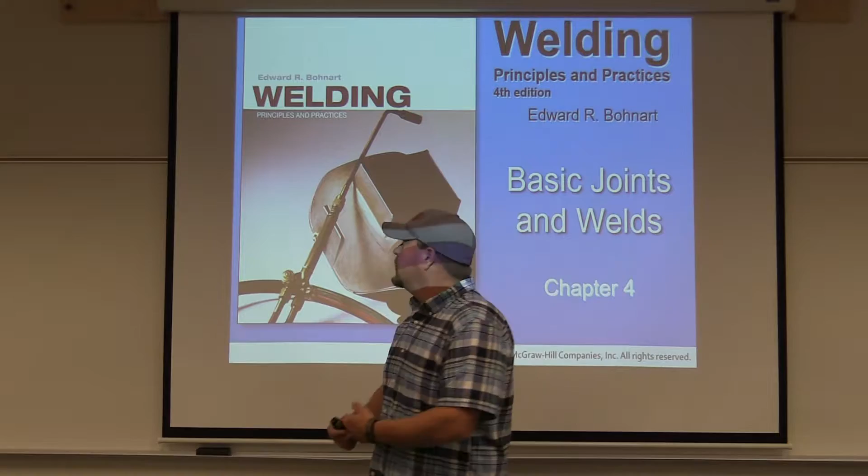There are going to be several different chapters that go beyond this as well. This is just the basic joints and welds to start with. Then we'll get into reading shop drawings in Chapter 29, and after that Chapter 30 will be welding symbols and so forth, all right?

Start out with the first slide here, main objectives. The 5 basic joints and welds applied to each. Remember, there's only 5 basic joints, okay? And how to measure fillet and groove weld sizes.

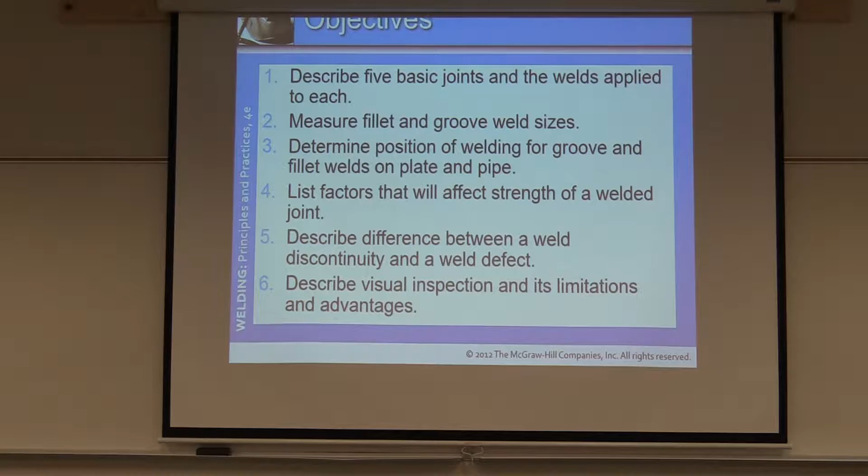Let's cover the basics first. So if you're in your book, go ahead and flip to page 118, Chapter 4. I would definitely highlight underneath types of joints - beginning of that paragraph, there are only 5 basic types of joints: the butt joint, corner joint, edge joint, lap joint, and T-joint. Shows them all, and then an explanation above that in figures 4-1.

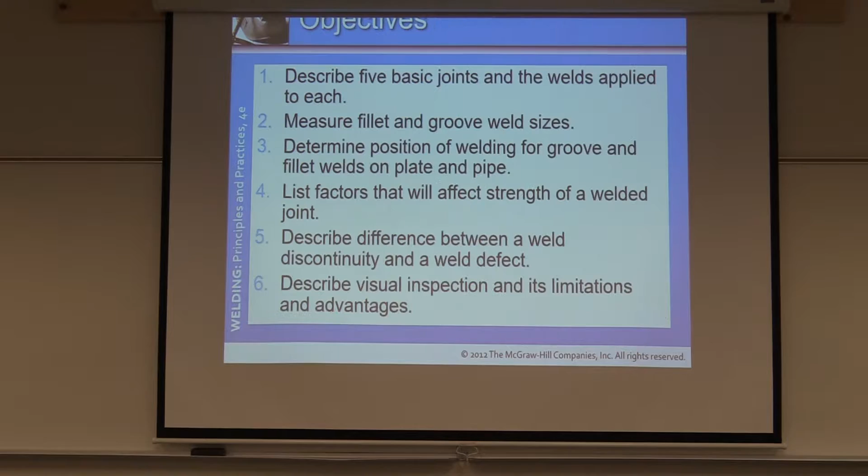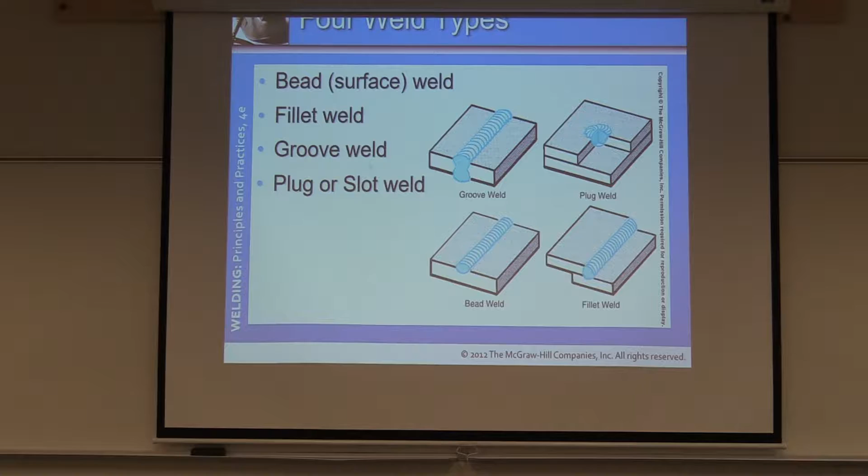Okay. I cannot believe - wow, it does not show the 5 different types. So, there's a few things that I wish were in the PowerPoint. However, I'm not always able to accommodate because they may not have those.

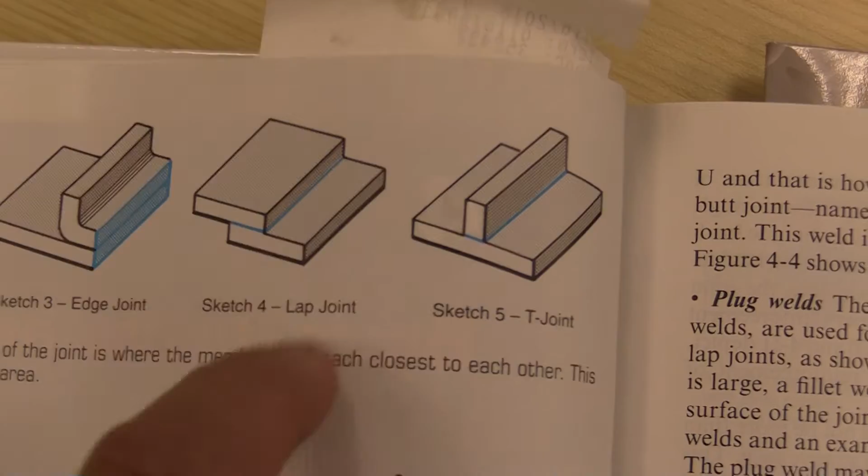So let's touch on them this way. Sketch 1 is the butt joint where 2 members butt up against each other. Okay, the corner joint, where 2 pieces are on their corner. Edge - pretty self-explanatory, the edge pieces of both. And a lap joint, okay?

And a T-joint. Now these are not to be confused - sorry, when we get into fillet welds I'll explain this further on. Let's just leave it at this for now: a lap joint, T-joint, that is on page 118, Chapter 4, okay?

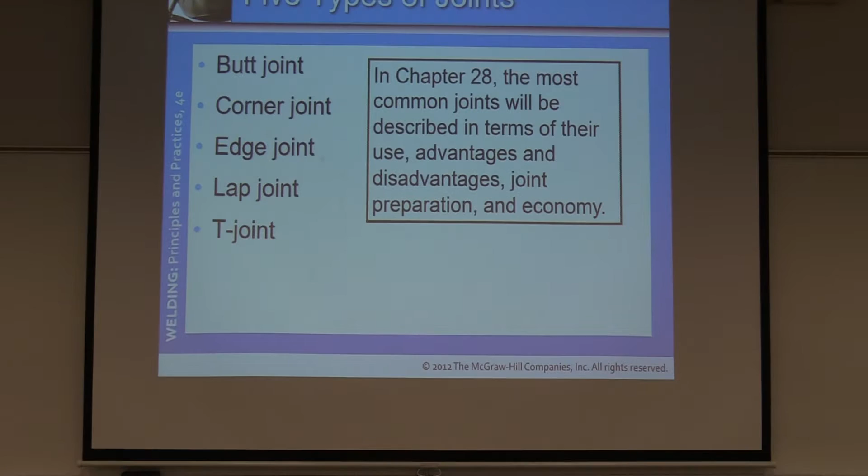All right, moving on. There are 4 weld types. They were also in that same, right underneath there in figure 4-2, same page, page 118, Chapter 4.

There's a bead weld, which basically is a surfacing weld, correct? A fillet weld, far right hand bottom corner there. A plug weld, and a groove weld.

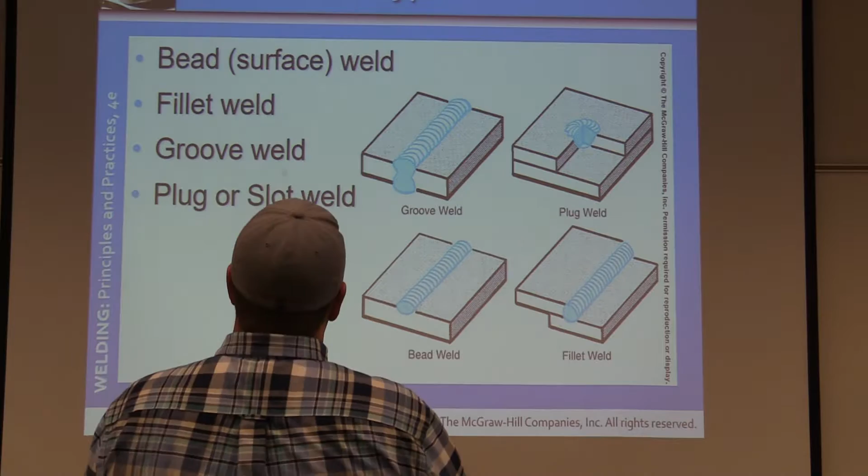So one of the things I want to help explain is that this is a lap joint, okay, but a fillet weld. So a lap joint is where 2 members are lapping over each other. However, if you notice, it's the same weld, the same triangular shaped weld that would be on a T-joint. Same thing, same fillet weld, whether it's a lap joint or a T-joint.

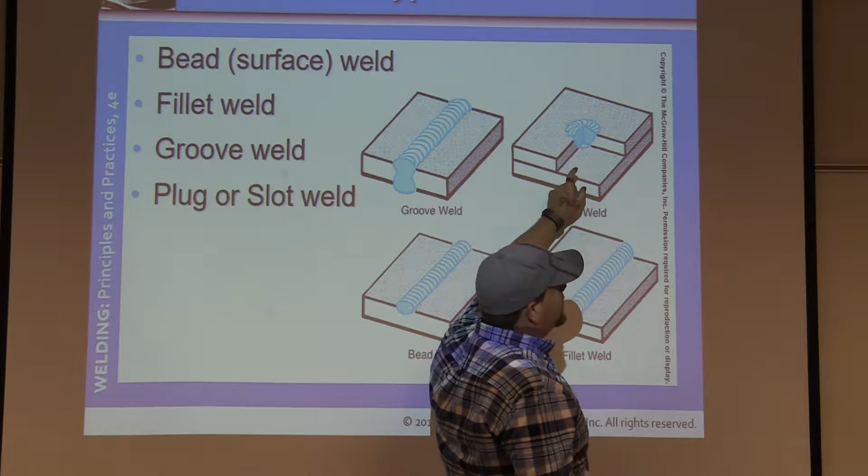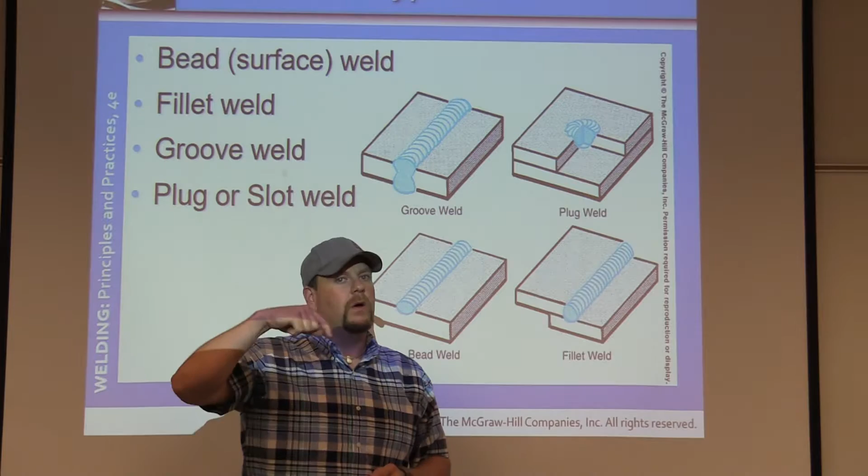A bead weld, as you can tell, that's just for the surface, the surfacing weld itself. Now a plug weld can be several things, of how it can be classified, I should say. To start out with, say the plug is 2 inches deep - the entire thing would be a plug weld. However, each pass might be a fillet weld as we are going around, going up to fill the plug weld, okay?

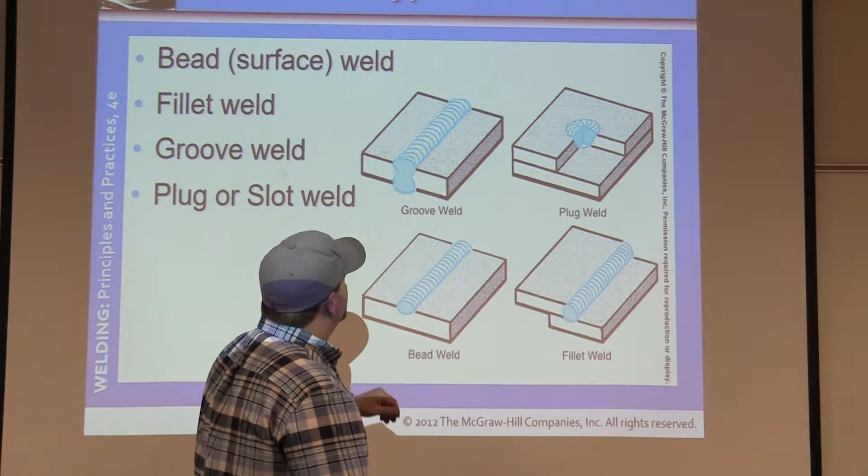Groove weld is done in a groove situation. So we'll talk a little bit more about this as we're going through. But under page 118, Chapter 4, I would make it a point to highlight the bolded items under the 4 weld types: the bead weld, fillet weld, groove weld, and plug welds.

Okay, I don't see anything specific that I want to point out on that page. So a bead weld is also called a surfacing weld - single pass deposits of weld metal used to build up pad of metal and to replace metal on worn surfaces. First welds that we do in shop, correct? Just on the surface.

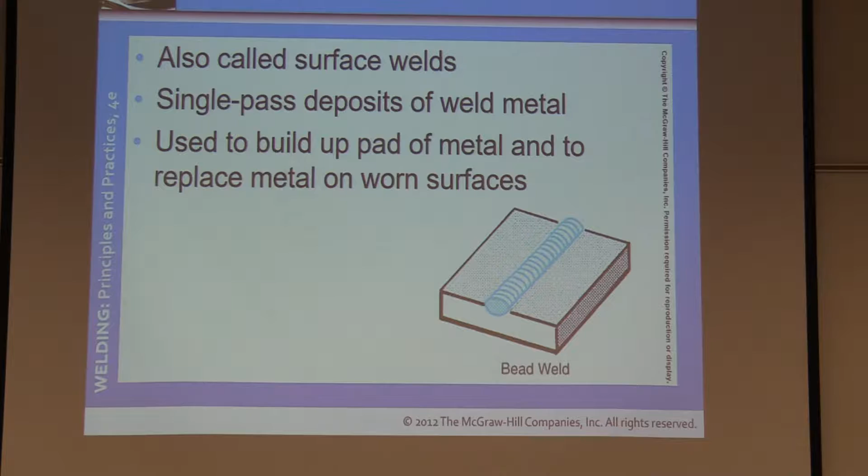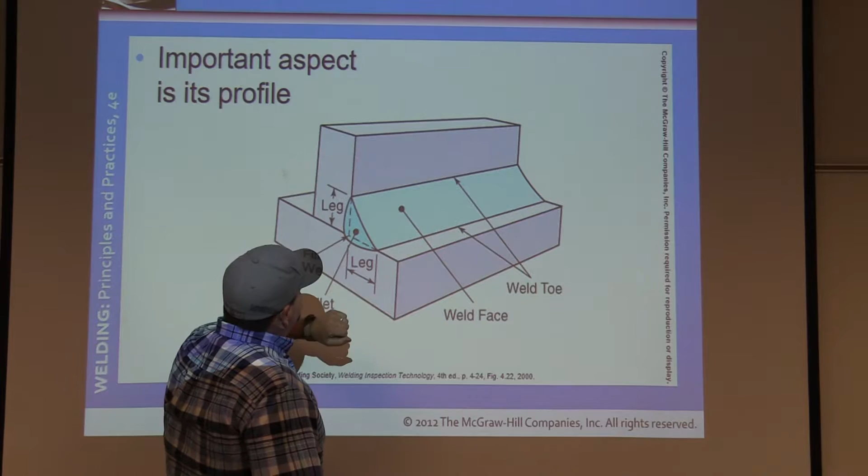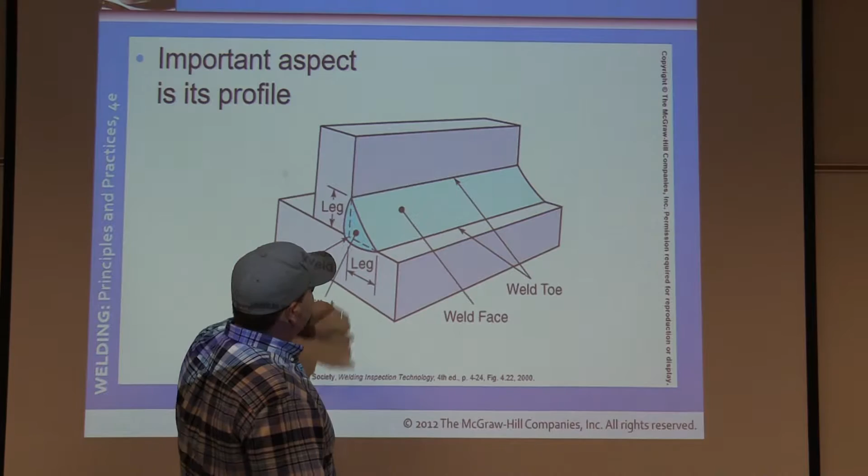Okay, let's stop right there. So right here, we've talked about this in other sections or chapters as well. We are measuring the size, but it is a right triangular cross section that helps define a fillet weld, okay? It can be measured off of different leg sizes and so forth. However, a right triangular cross section...

...is how we define a fillet weld. As you can tell, I keep saying that for a reason - I really want you to know that it is a right triangular cross section. Right there, okay? It's used on lap joints, T-joints, open corner joints.

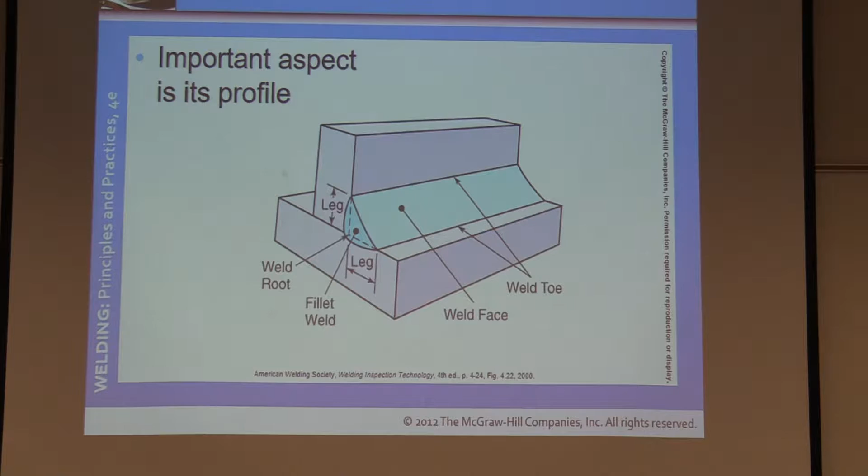We will learn the weld symbol as we go further on. It's important to know as you're looking at the fillet weld especially. Let's make note of where they are.

Weld face is the face of the weld that we're going to see. The weld root is where the two closest members are joined. I want you to look up the definition of the weld root. When we get into weld symbols, we will be breaking this down even further. However, it's where the two members are closest together that are to be welded.

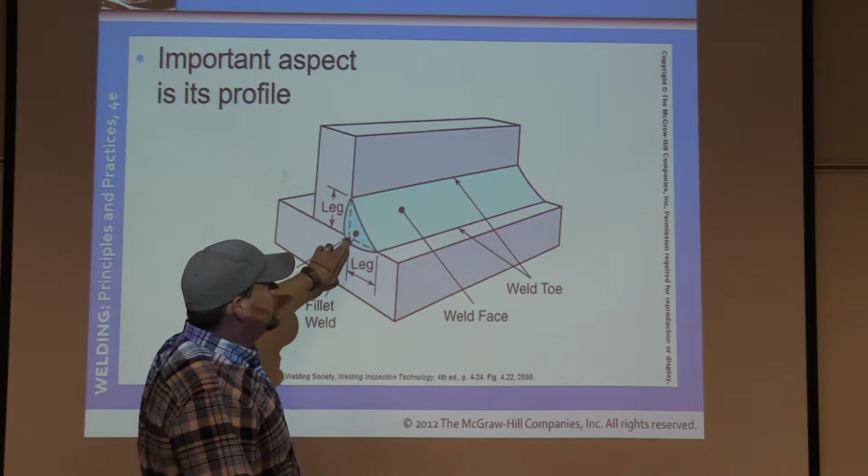The important thing is the leg size. Remember, that's how we size a fillet weld. We measure the distance from the root to here, half inch, or whatever it might be. At this point, we definitely know what the weld toe is.

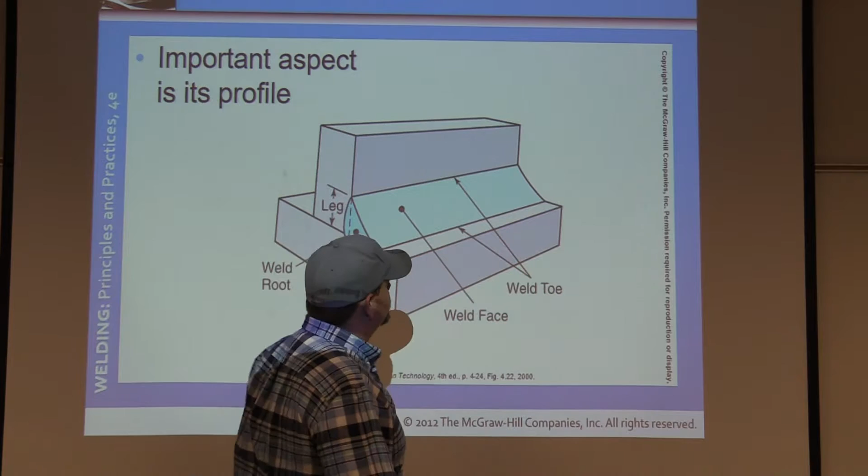Groove welds consist of one or more beads deposited in the groove. Used for butt joints, unprepared with square edges, prepared with bevel or a J groove. If both members are prepared the same, they take the shape of a V or a U, named V or U butt joint. Wow, that's getting a little too crazy there.

We'll talk about that in welding symbols further on. But if you notice, look at this, and I said the same with fillet welds, it consists of one or more beads. So it could be a single pass, which is just one weld, or you may see it referred to as a multi-pass or multiple pass weld, fillet weld or groove weld, and so forth.

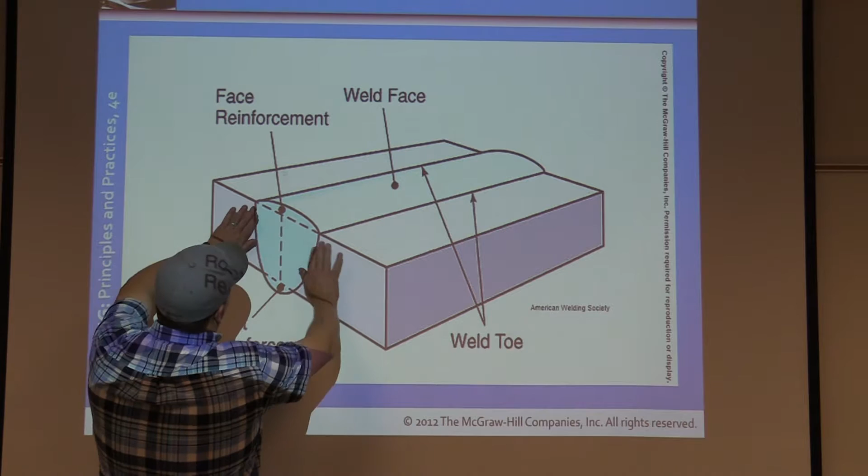Groove welds are just what it's showing here. In this particular situation, these two pieces of material are butted up together, so this is a butt joint. Now there's no angle of preparation on it whatsoever.

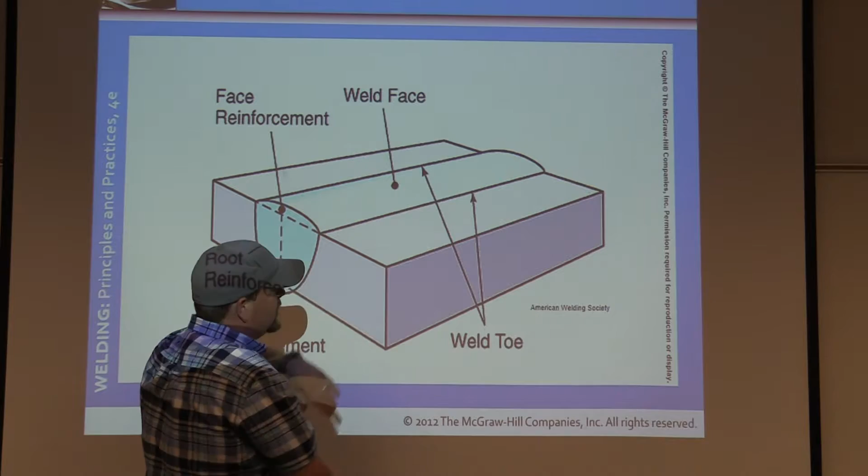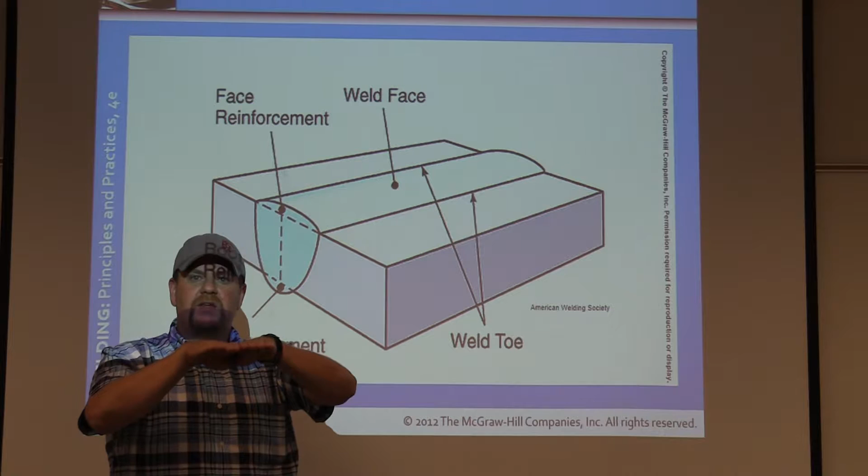This makes it look like it's 10 inches tall, but again, this is not to scale. A butt joint is a butt joint. It doesn't matter whether it's 1/16 or a razor blade thickness, or if it's 10 inches of steel. If the two members come together and butt up against each other, it is still a butt joint, no matter the thickness of material that we will be welding.

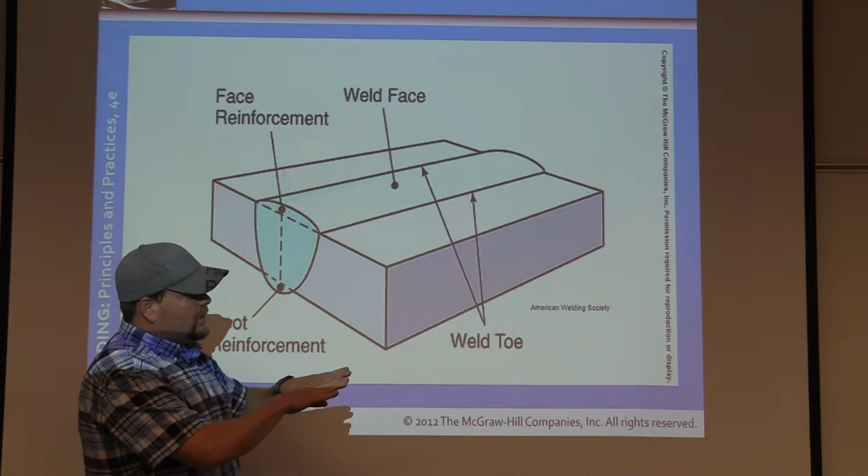So in this case, it might only be a real thin material, and I'm assuming so since there's no angle of preparation on the weld at all. So this is more than likely a single pass groove weld on a butt joint.

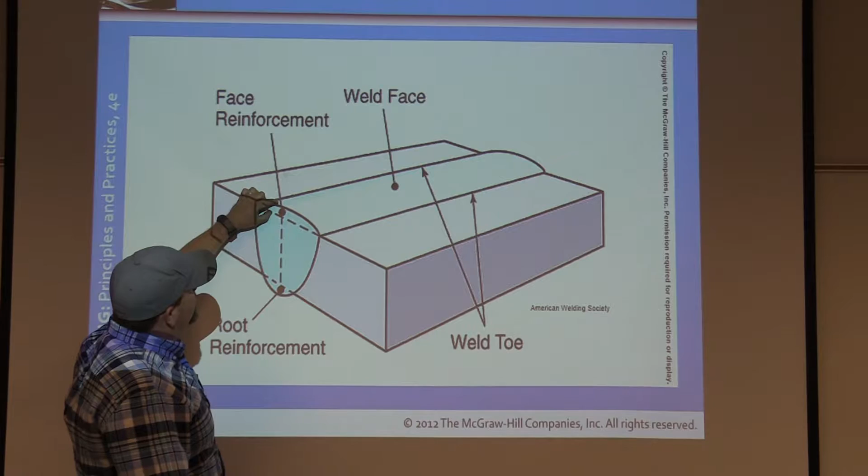The root is down here, where the two members are closest to each other. The face reinforcement is this amount of material that goes from the toe here to the thickness. It's the weld face. And the toes of the same weld, each side has a toe.

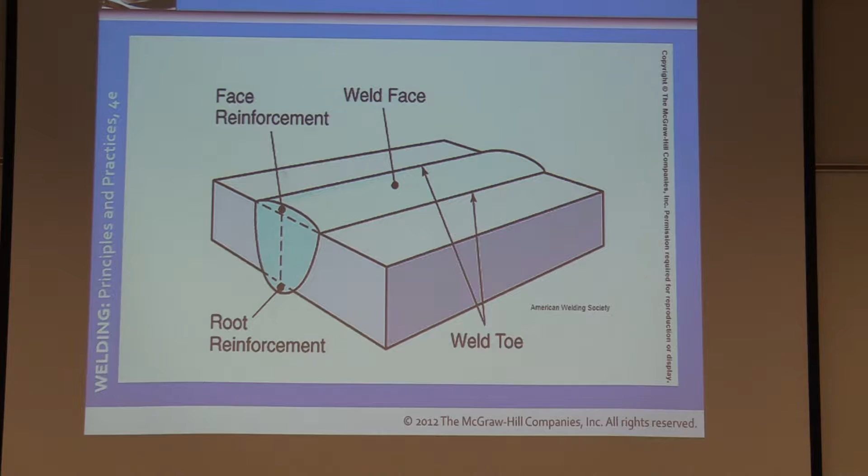Okay, moving on. Plug welds are similar to slot welds, used for filling slotted or circular holes. Fillet weld may be made around the faying surface of a joint in hole, if hole is large. Well, that's rather confusing. It may or may not completely fill the joint.

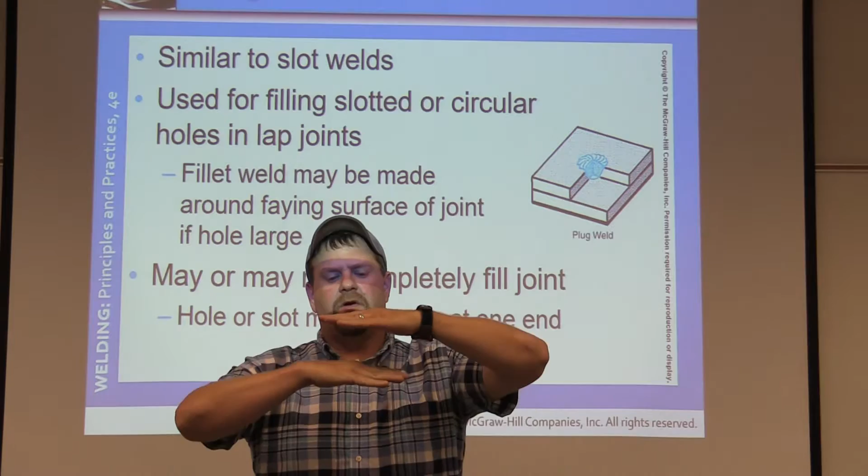So let's talk about faying surfaces. How do we define, when you see something like this, a faying surface? A faying surface, if I have two pieces of material, are the two surfaces that are touching. So in this case, our faying surface is right here. Both of these pieces of material, in between where the two are.

So the faying surface is the sides that are touching. Now if we could weld the entire length of that up around it and not have to weld the whole thing solid. In this case, here's the faying surface. You're doing a plug weld down into this, tying into the bottom piece as well.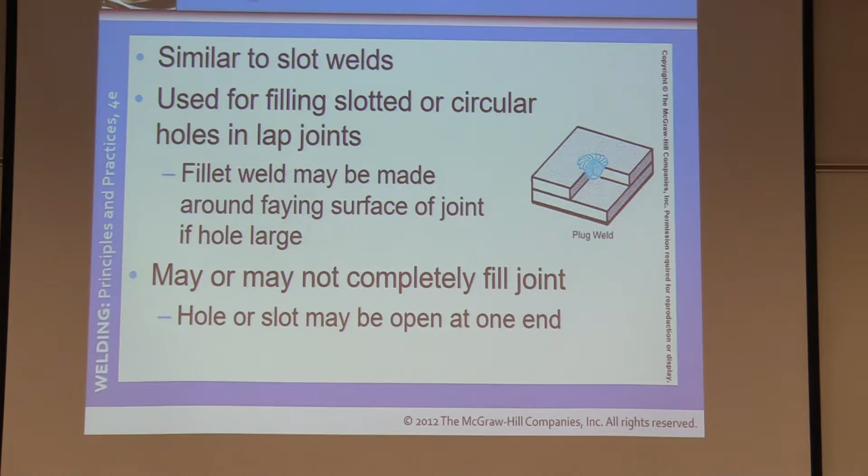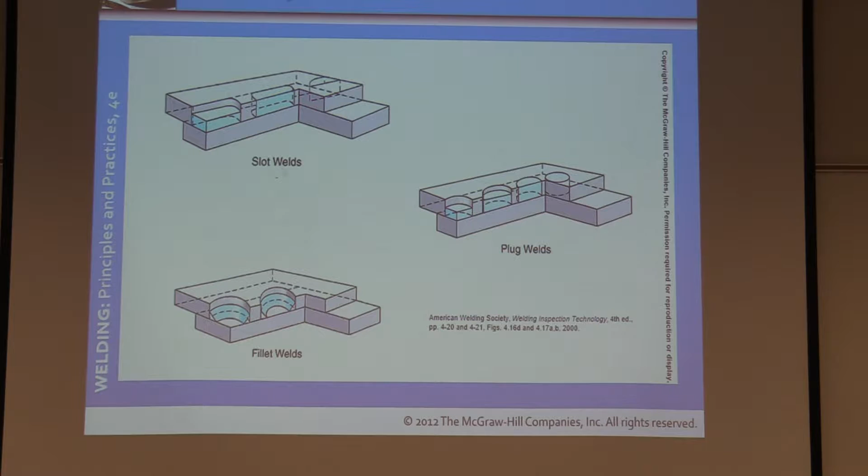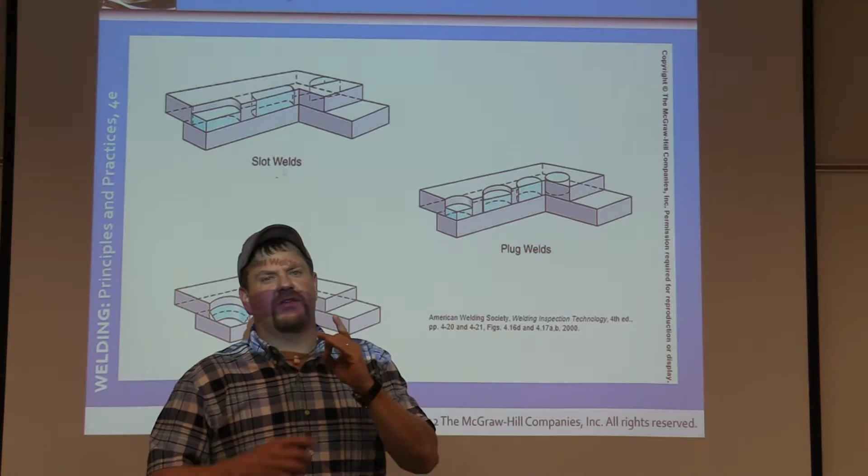Here's slot welds, plug welds, and then fillet welds. So here's what I was discussing earlier. Let's talk about the difference of a slot versus plug. The plug, we can see it is a true circle, so the diameter is consistent all the way around. So 1 inch would be 1 inch, perfect circle, correct?

At this point, more than likely we've taken blueprint and talked about diameter in a full circle versus an oval. Now in the slot, you may see it may be 1 inch in diameter, however it might be 3, it might be 10 inches long. Where do we use slots?

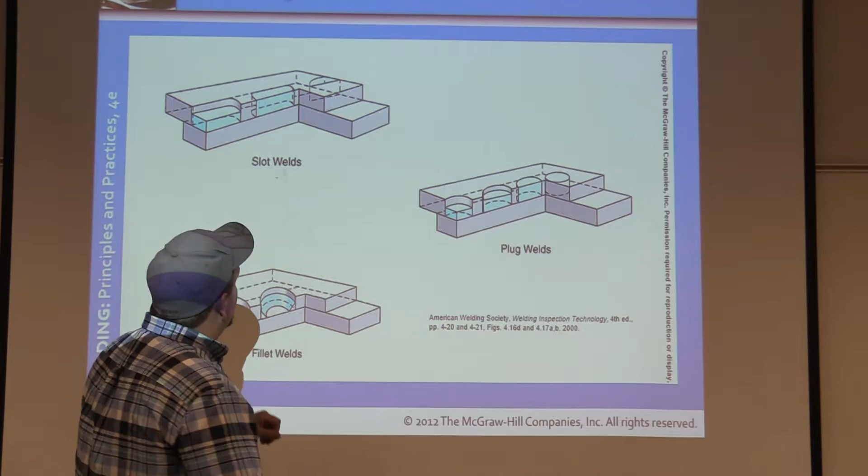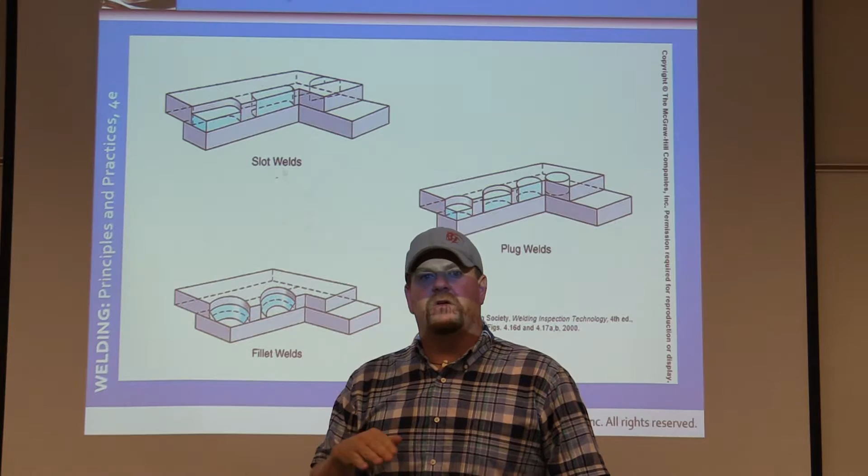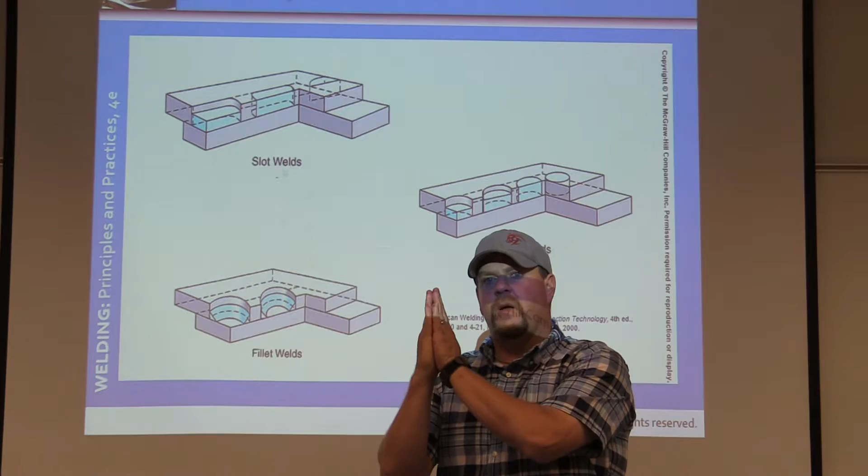Slots are used a lot on replacement equipment, whether it be in chutes for grains, like a grain silo, where the inside liner is made of possibly a stainless steel construction so it doesn't get contaminated. You may have a slot weld where you have your base chute in, and then you have a liner that goes over top of it. You'll weld this slot weld up because it gives you more surface area to weld to instead of several holes.

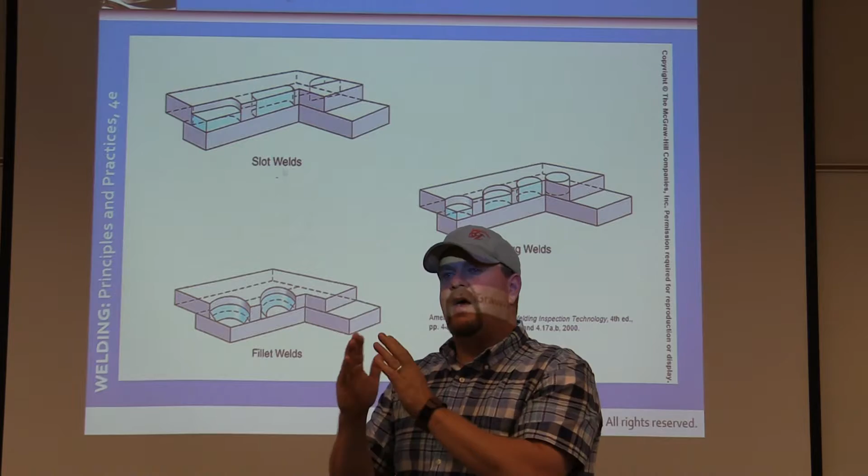You would weld the liner in, and once it wears out, if it gets to the point where it starts to wear down from abrasion, resistance, or impact or something, you can go in and pull the liner out, cut it out or air arc it out, and then bring a new piece in and replace the material without having to completely rebuild the entire structure.

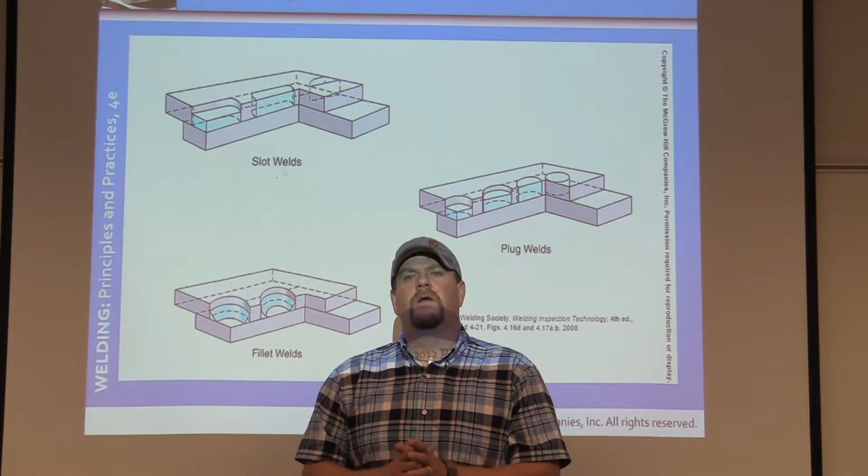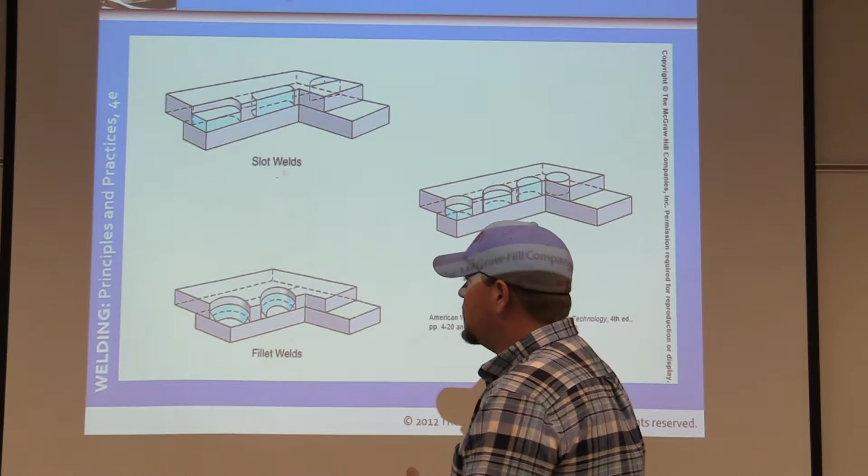Liners are used in everything from food products to road construction, heavy equipment, all sorts of things. Some of the liners aren't even metallic. We might build something out of a metallic structure, but it may have a ceramic lining or some other special sort of lining, especially in the pharmaceutical world, to keep contaminants from getting within our medicine. There's a whole world of possibilities within liners, materials designed for that special type of application.

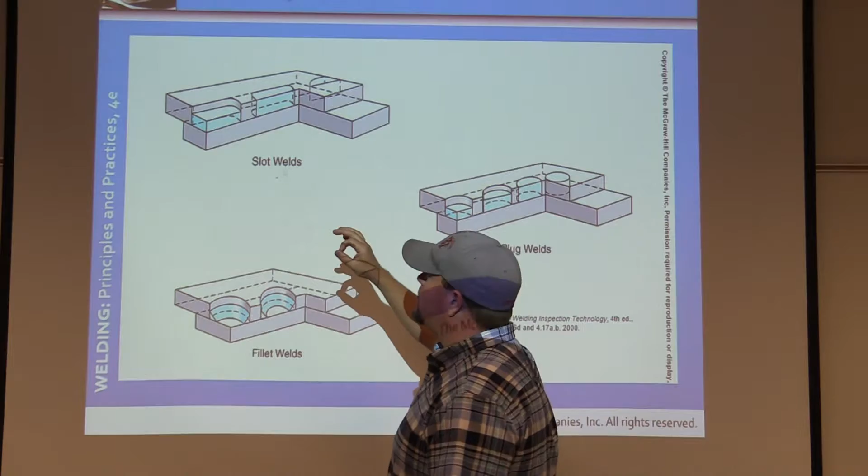So again, plug welds are circular, diameter is the same all the way around. Slot welds are basically a long oval.

Now here's what I was showing you earlier. This one, if it's welded up to where it's a full thing, then it becomes a plug weld. This one here might be at a situation where it's only two-thirds full, half full, all the way full - they're still plug welds. This is a plug weld with a fillet weld on the inside. If you notice, it has a triangular cross section.

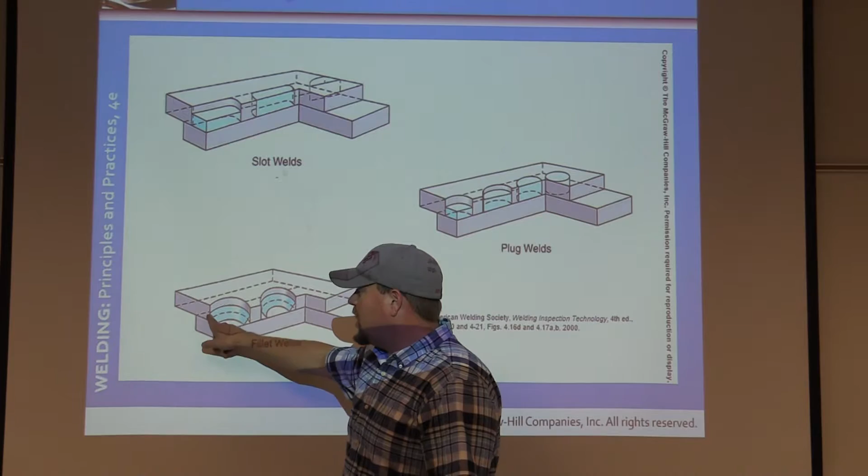Design engineer determines the load carrying capacity of a welded joint. It's specified on the drawing, using welding symbols - symbols covered in chapter 30, which we'll be covering later.

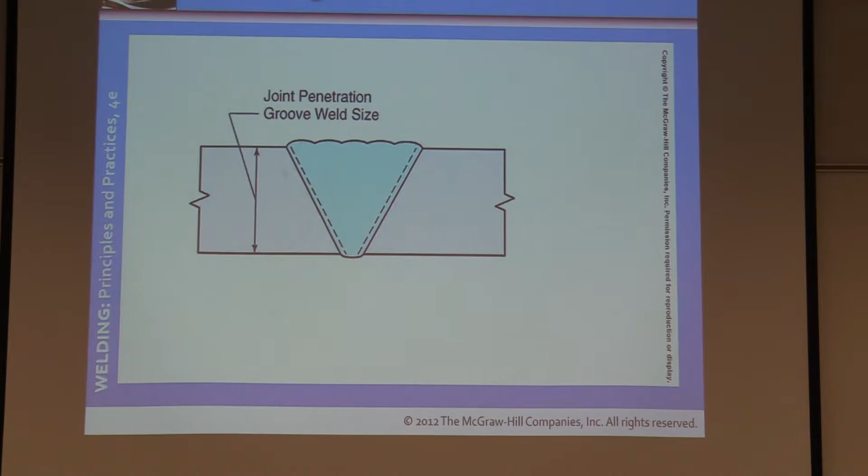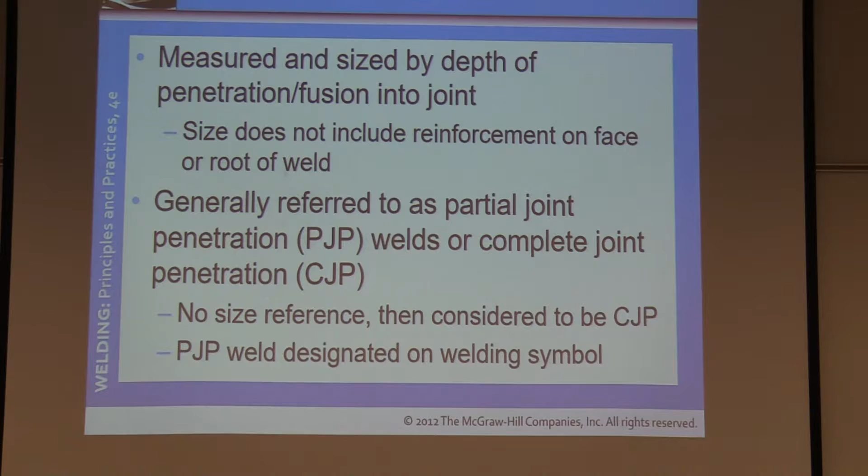This is kind of a little backwards from what I would want it, however let's talk about it. Groove welds are measured and sized by the depth of penetration or fusion into the joint. The size does not include reinforcement on the face or root of the weld, generally referred to as a partial joint penetration or a complete joint penetration. No size reference then is considered to be a complete joint penetration; a partial joint penetration weld is designated on the welding symbol.

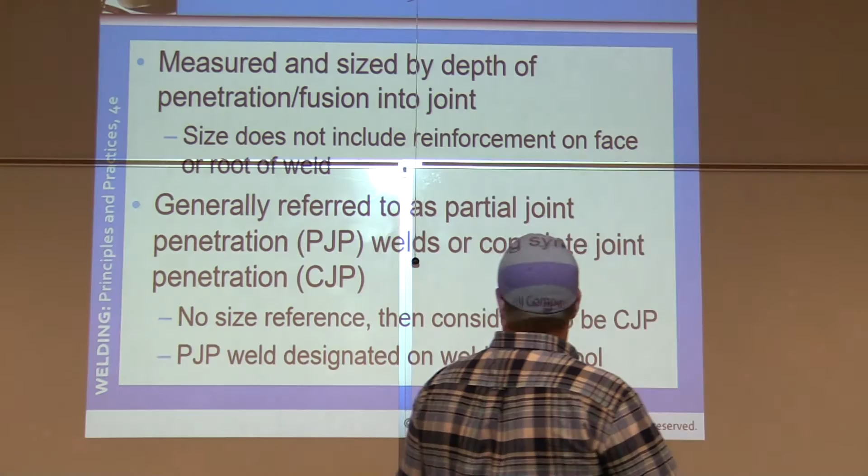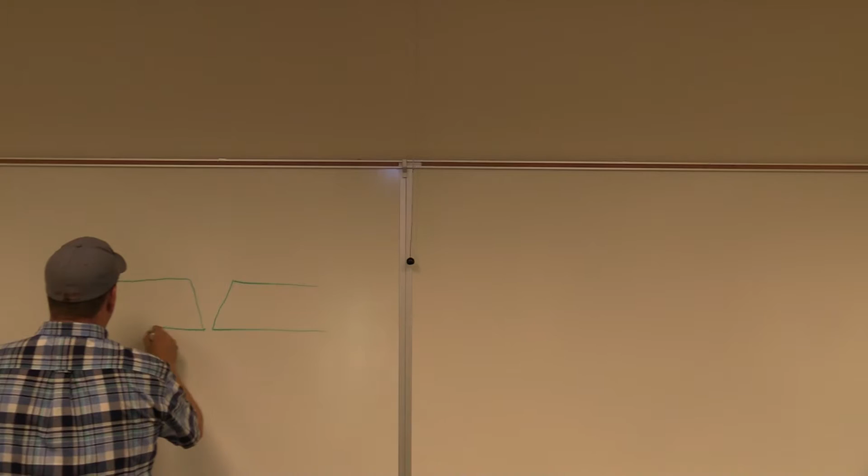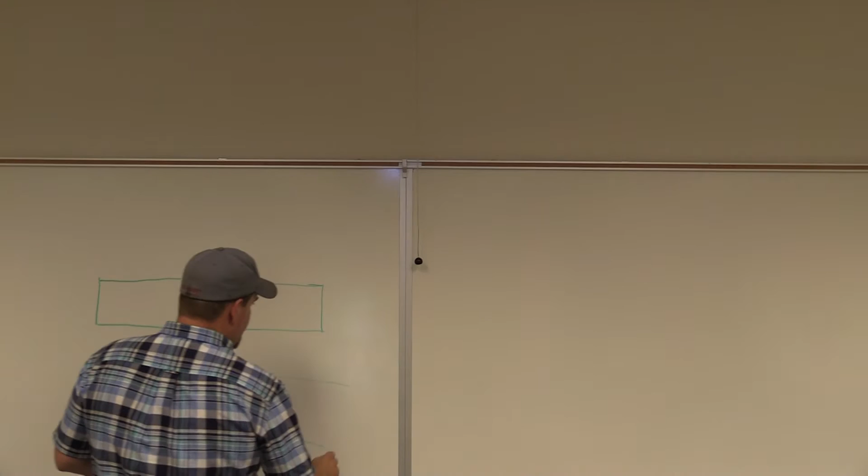So first of all - partial joint penetration or complete joint penetration? Let's give you a couple quick examples. There are several different types, and I want you to understand the concept. If you understand the concept, you should be able to look at anything and fully understand what we're looking at.

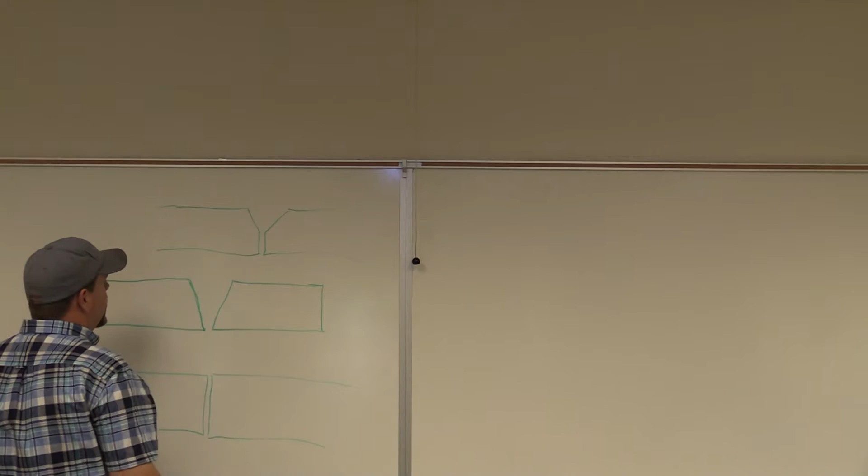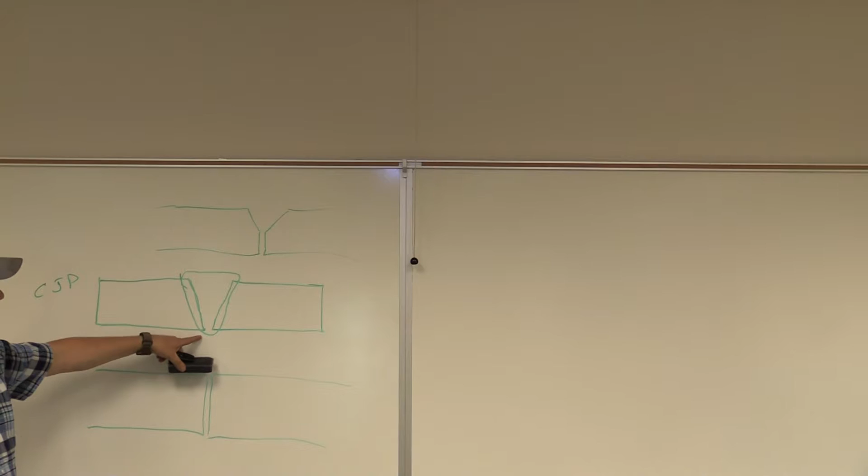In this case, this is our typical V-groove. Each member, it's a butt joint. However, both sides have had edges prepared and cut back to allow for a joint preparation for a V-groove. This is so we can get in there easier, a lot easier to weld up. This is very common - what you see as a complete joint penetration. But what qualifies as complete joint penetration is that the weld has to cover the entire complete weld joint. Now down here, a butt joint again.

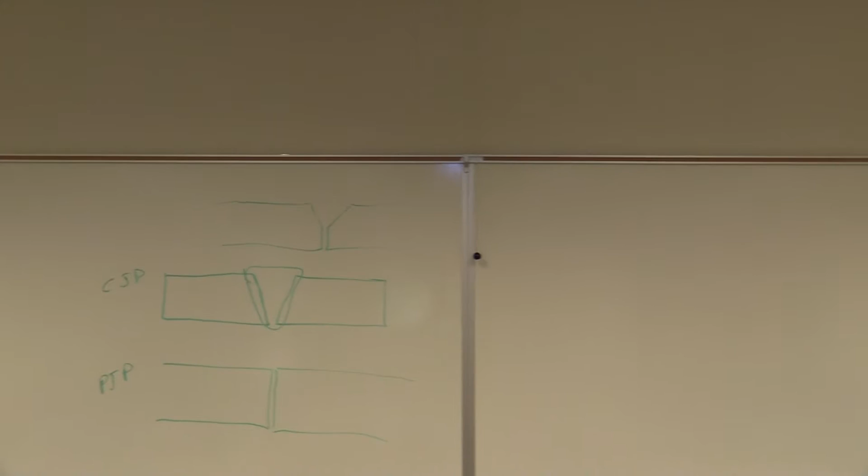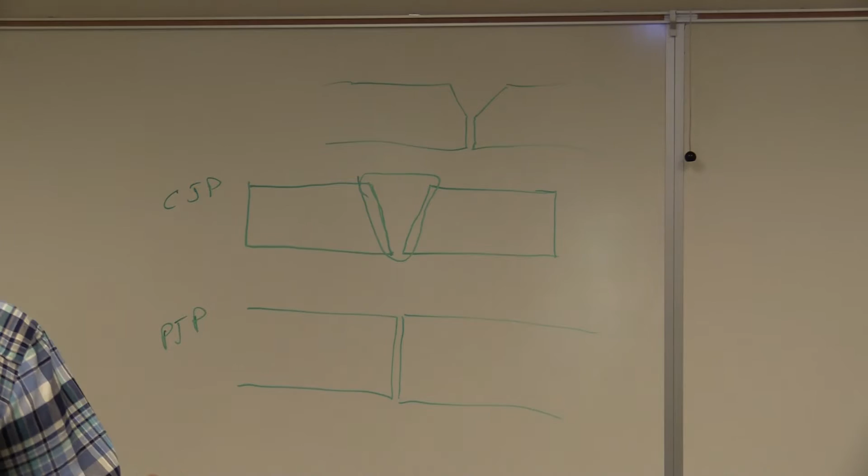Let's talk about a partial joint penetration. Say that we don't know how thick this is again - we're just drawing big pictures, not to scale. So one of the things we might want to take note of: say our weld only penetrates to here. Most people say, well why would you do that? Well, there's a lot of reasons we would do that. Not every weld has to be designed to cover the complete weld joint.

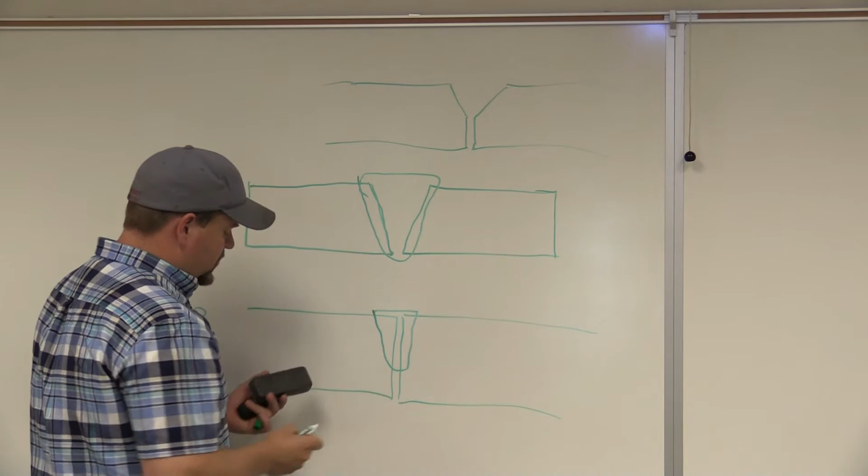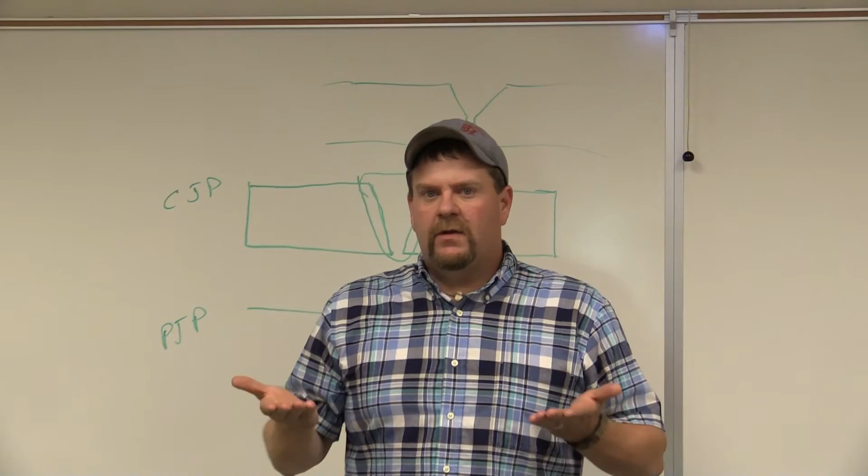Complete joint penetration, partial joint penetration - let's talk real quick about why we would want a partial joint penetration. Take road equipment - I'll reference this quite a bit because I've had a lot of experience welding on Caterpillar equipment. The bumpers, when you put your road grader down, the blade goes along the ground and helps flatten everything out. It's a really important piece to get a nice flat highway, road base, everything. We have to start there - we have to straighten and flatten this out.

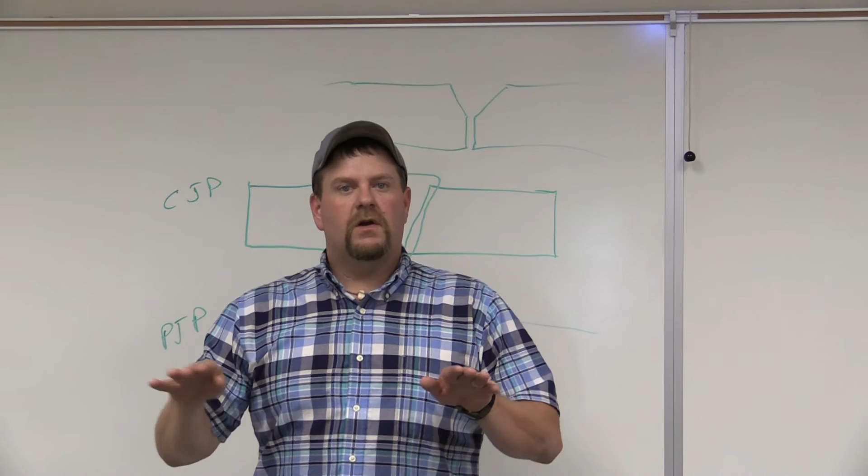What keeps the blade from digging into the ground is sometimes there's these bumpers that sit on the bottom, and the blade will come down and sit on the side of this bumper, like a big dome disc. That rides along the ground, kind of like a ski, and helps keep the blade from digging deep into the ground. If we just put pressure on the blade all the time, it would keep digging and digging, and we couldn't go anywhere, we'd have a whole bunch of holes. So we free float it sometimes on certain equipment, and use those bumpers to help go along the road.

If you can imagine, that's rubbing on ground and gravel all the time, so eventually this metal is going to wear down. So I'm going to do a quick drawing here real quick to show you kind of what it looks like. I'm no artist, but I'll give you a side profile.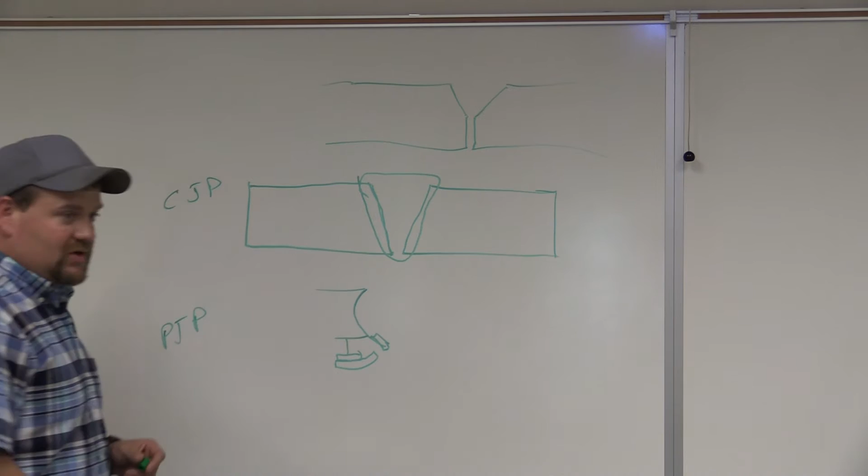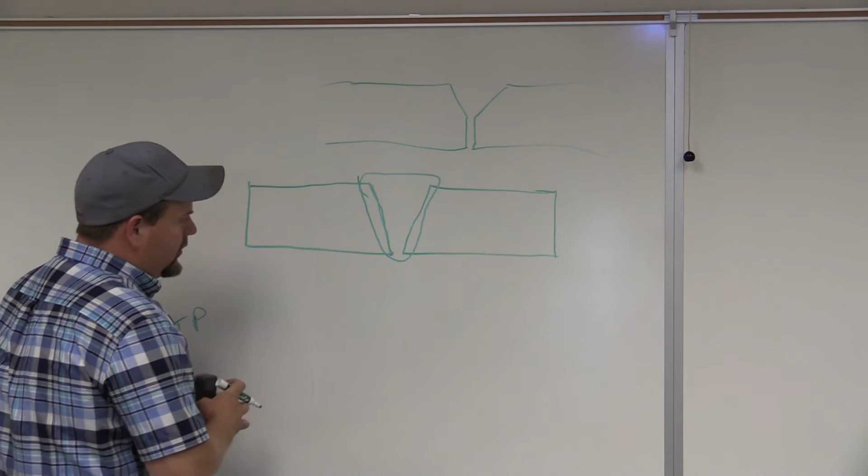So here's your road grader. This goes against the ground, but back here off of this is where we have our bumper. So here's a big piece like this, and a lot of times we'll have another piece of material that looks just like that, just like a ski, like I mentioned. Now if we welded this piece -- I'm far enough away now that I'm going to show it in detail, at a larger scale, because it doesn't adjust with the zoom on the camera.

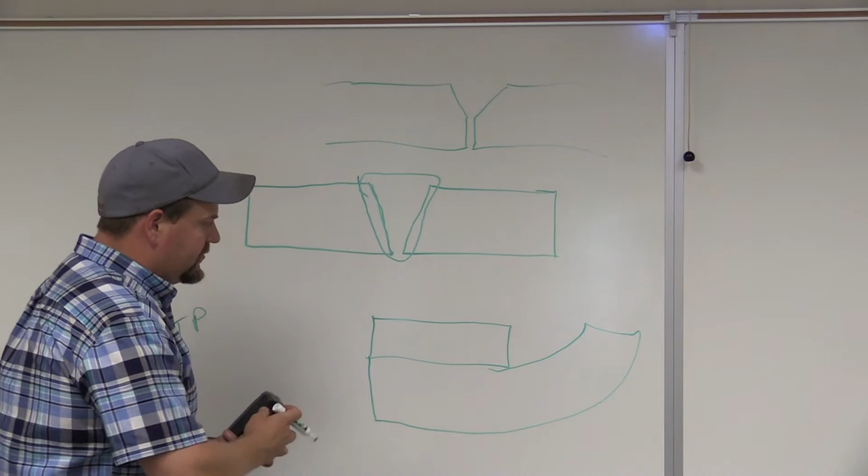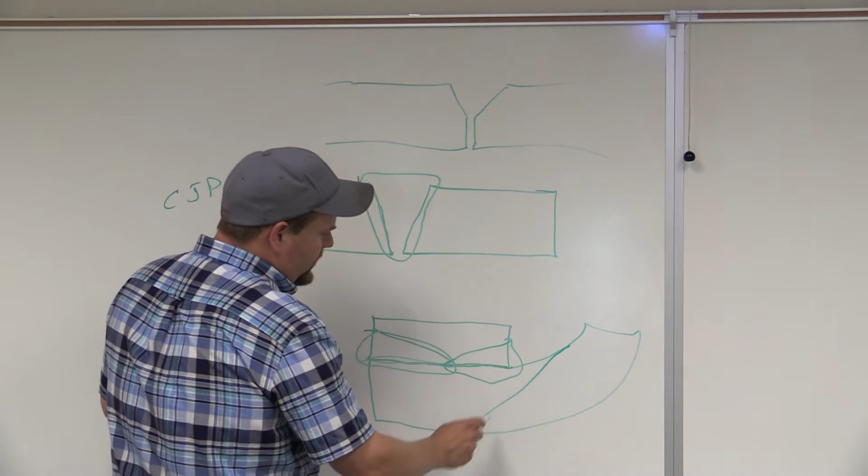So if we come in here and cut this back and welded this entire thing solid, then this would have to wear down at a nice even rate and shear off perfect. Well, in the real world that doesn't happen. Usually what happens is this will wear off first, and then it'll come in and start wearing here, and then it'll wear into this. So we don't want a full, complete joint penetration in that application.

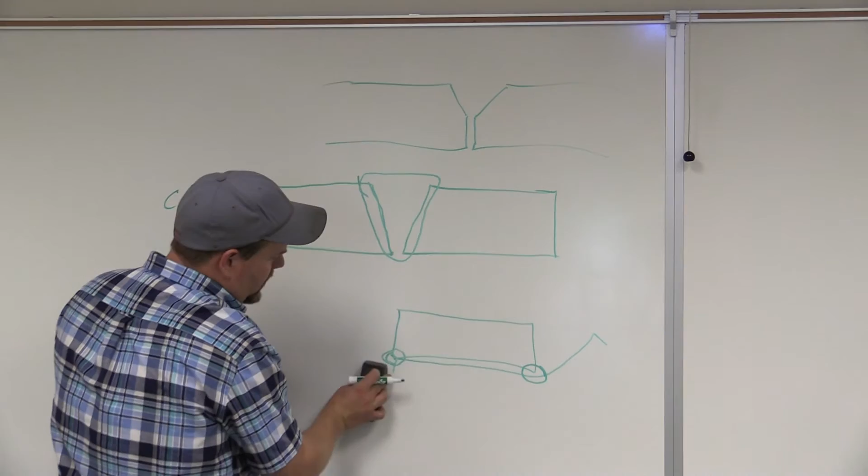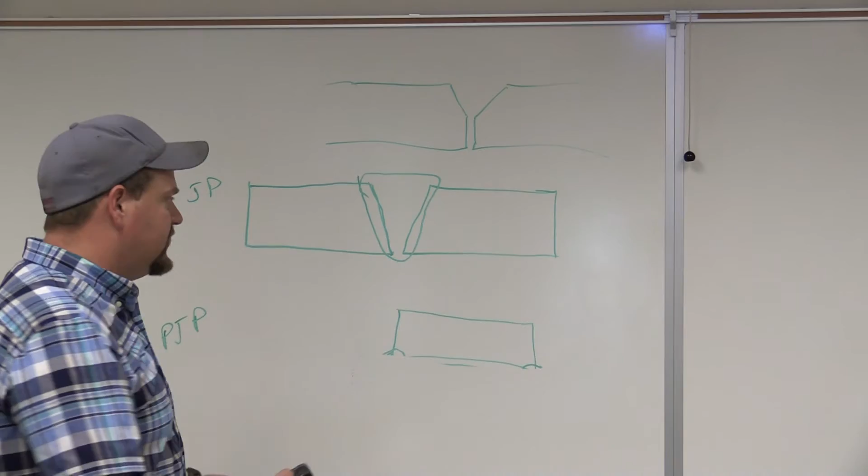What we want is this: we may want to tack or weld here, only that deep, and then we want one up here as well. So what happens is as this piece wears down, when it shreds this weld, we no longer see that piece there. So it's what we call a visual aid or a visual check. We're going to walk around with a piece of equipment, look down, look at that bumper, and see if it's back into what they call the frog, the main part of it. If that shoe is gone, then we know, okay, that's our visual check, we need to get it fixed real quick.

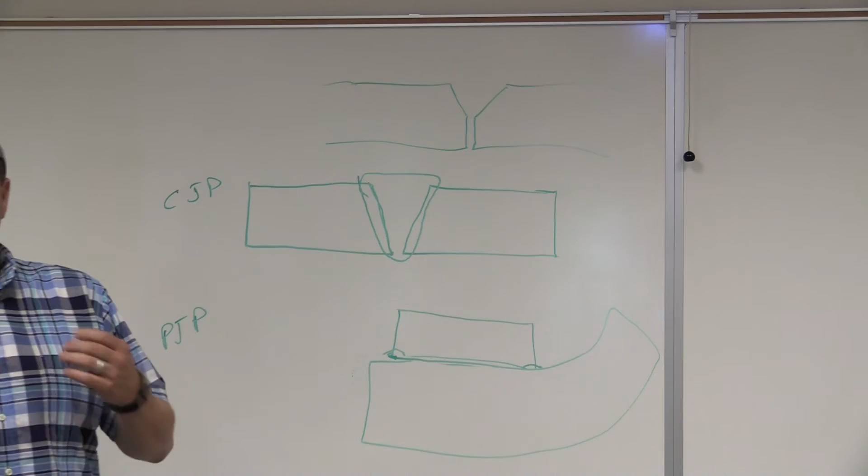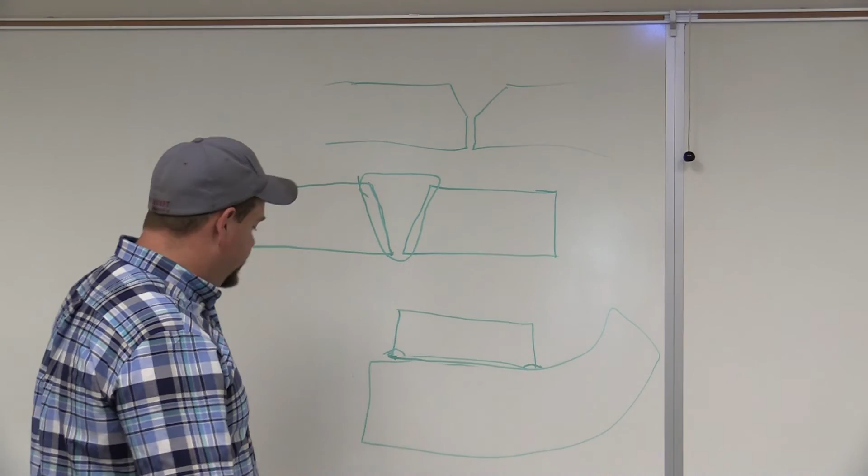Or we check the wear on that -- that's a daily check with most road equipment. This piece is usually made of a milder steel, and then the other piece is usually made of a lot more expensive, harder steel designed for abrasion resistance and impact resistance as well. It's going to wear out possibly 5 times slower than this piece would. This piece might last 5 weeks. This piece, if it was on the dirt, it may last 1 shift -- almost literally, it would wear down that fast. So there's different applications of what we're doing. That is a good example of why we don't always need to have a complete joint penetration.

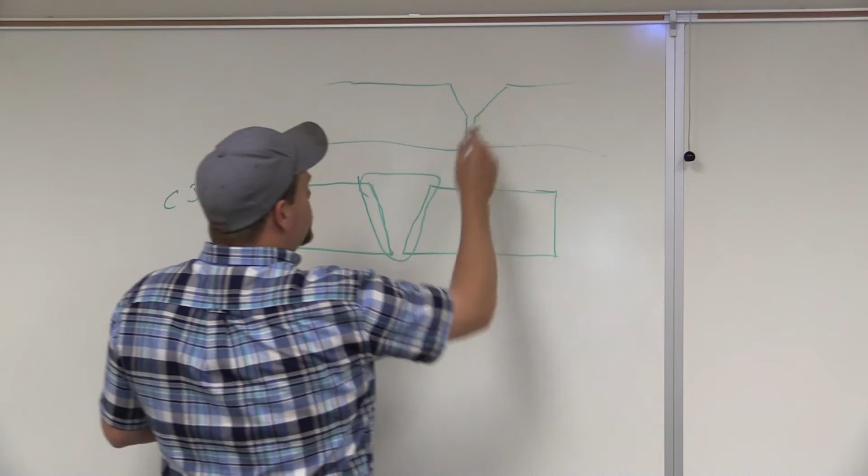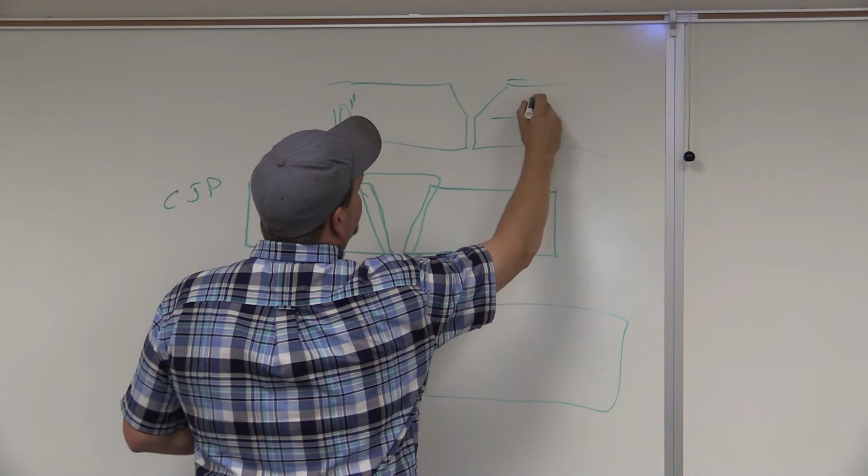Now, just because we said that -- I want to be clear about something here. This could be 10 inches thick, and the angle of prep could be 5. Just because we said typically a V-groove weld is a complete joint penetration does not mean that every groove weld we see means it's a complete joint penetration either. You have to look at the print, look at the drawing, see what it's designed for, and weld it accordingly.

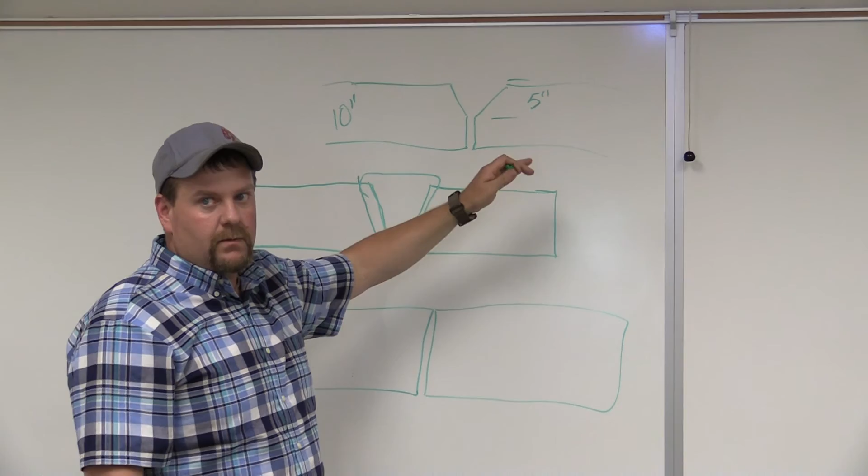In this case, if that's 10 inches thick, it would take a tremendous amount of time to weld that up. It may be inefficient to weld it up. It may be designed just like the shoe we were talking about -- designed to come apart and fall apart when it gets to a certain point, to protect the equipment we're working with. So again, partial joint penetration, that's all that's required.

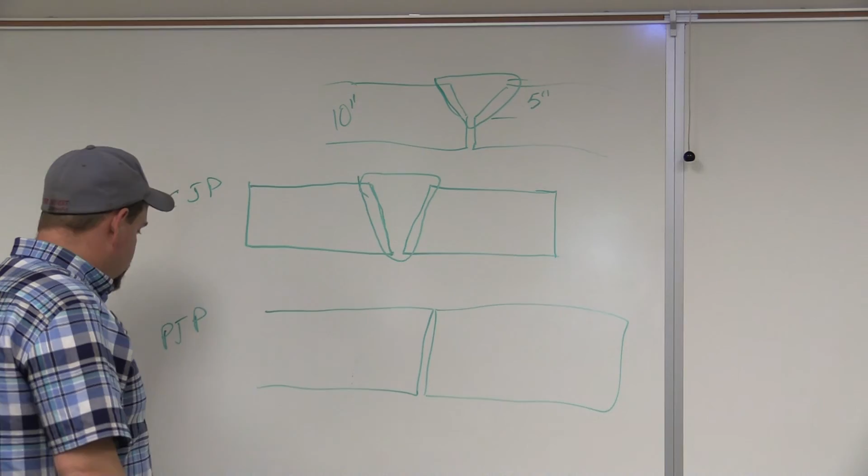All right, so complete joint penetration, V-groove butt joint.